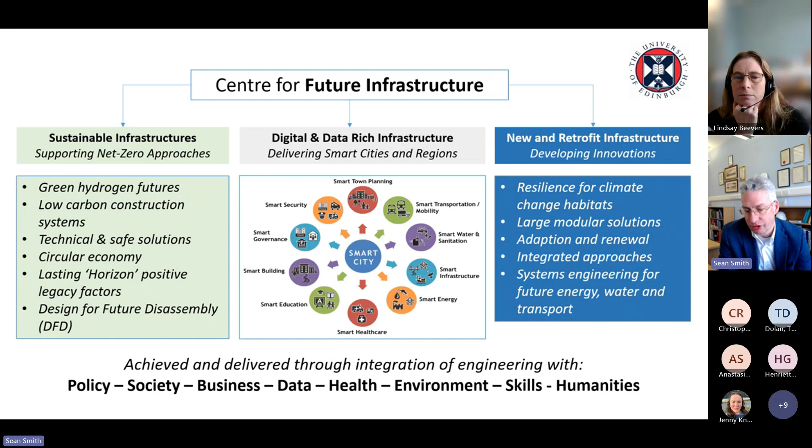Most importantly, our role is to link across many of the other schools - there are 22 schools across the University of Edinburgh - and already we've had projects linking geosciences, health, humanities, law, and various others.

So a bit about the future: we're going to spend a lot of money globally over the next 20 to 30 years, roughly about $100 trillion, on buildings, transport, and infrastructure - a huge and significant sum of money, very much needed when we look at resilience and infrastructure, both in the UK and overseas, but also when looking at societal growth.

This is one of the key features going forward as we approach the year 2100 and the population growth that's coming. One of the key things we'll have to deal with is how we're going to build 2 billion new homes in that 80-year time period - a huge increase in resources and all the related infrastructure that comes with it.

To give you an idea of what that means: taking the 29 countries on the left-hand side mapped across Europe, given that population, what we have to build in the next roughly 80 years is the equivalent of 6.25 Europes all over again globally - plus all the related infrastructure of hospitals, offices, industry, etc.

And therefore, of course, we have to be as sustainable as we can. Hence all the projects that CFI is involved with have a very strong environmental strand, as do many of the research colleagues both here and across UK universities.

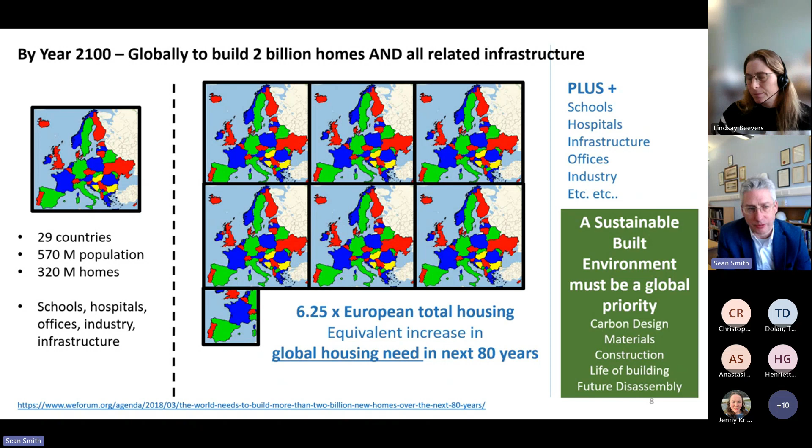I was giving a presentation back in November, talking about the timelines, whether it's Scotland, the UK, or Europe's net zero targets - 2045 and 2050 respectively.

Sitting down with civil servants, you tend to find we're talking about 22 years or 27 years away. But in fact, in Scotland we don't have that kind of time. We have 192,000 hours, but taking away weekends and half Fridays when construction doesn't work, we're down to 111,000 hours between November last year and November 2045. And we don't work 24 hours a day, so if we're really productive, working 8 hours in a 10-hour day with travel time, we're literally down to 36,900 hours.

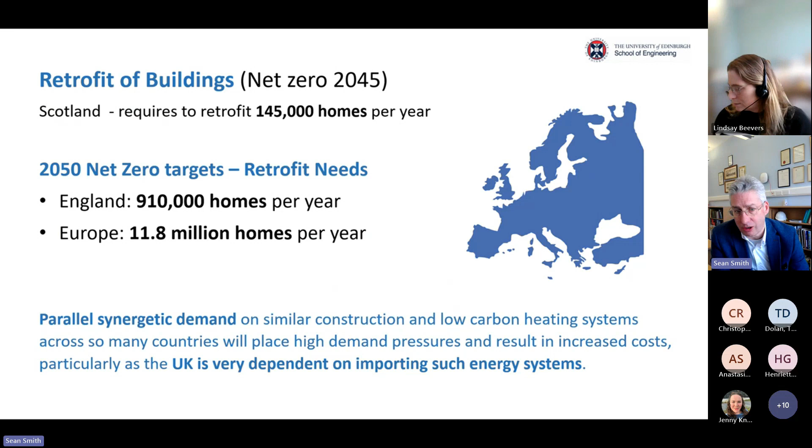On top of that comes all the work to come. In Scotland, we're going to have to retrofit 145,000 homes per year. England's about 910,000 homes per year, and Europe's just short of 12 million. What's incredibly important is that 85% of all countries around the world signed up to net zero after COP26 in Glasgow, so we have parallel, synergetic demand on very similar material resources, policies and ambitions.

So we can't carry on retrofitting house to house, starting all over again on each one. Could we look at an archetypes approach instead? This is one of the features we've pushed hard on, north of the border. We know this is also being looked at in England and Wales, and in countries like Germany and France. So when we do specific testing on archetypes to create solutions, there are specific tests we should all be doing, and we're collating a database and knowledge exchange point to accelerate this approach.

By archetypes, for example, in Scotland we have very old stone tenement buildings, roughly about 240,000 of those, all built pre-1919. They're hard to treat. We have 400,000 timber frame buildings in Scotland alone, something like 750,000 in England. That's a key archetype where, in terms of retrofit, we can approach it faster, better and more productively.

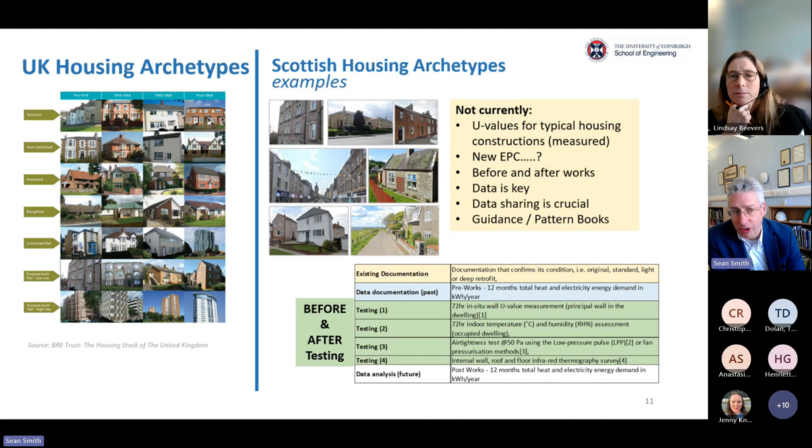We produced a report along with all the registered social landlords, housing associations and local authorities in Scotland, on achieving net zero in social housing a few years back. Within that we published a paper discussing the archetype approach for mass retrofit. That was then published by Scottish Government, and since then they've issued a tender on it. But in the meantime, everyone else has been cracking on individually, and we need to bring that archetype data together.

Scotland has a particular issue, just to explain. We have the highest proportion of flats in the UK, roughly about 38%, compared with England at about 21 to 22%, Wales at about 13%, and Northern Ireland at about 8-9%. So we have a pretty tough task ahead.

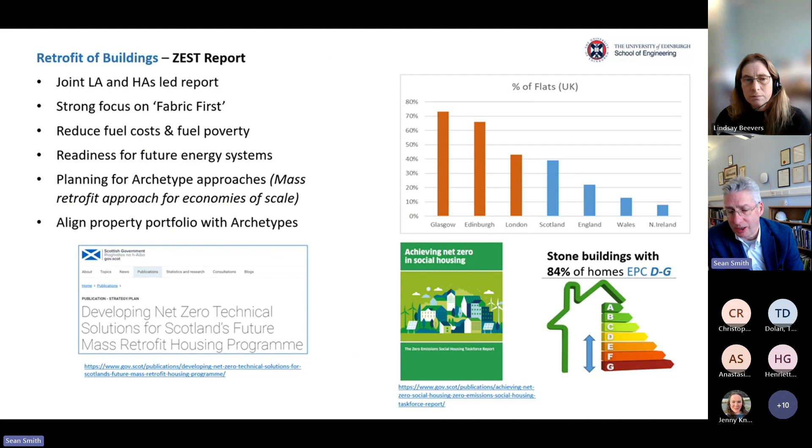In addition, the cities of Edinburgh and Glasgow have the highest density of flats of any city in the UK, at 68 and 73%. London's about 46%. So we've been running a series of workshops looking at archetypes.

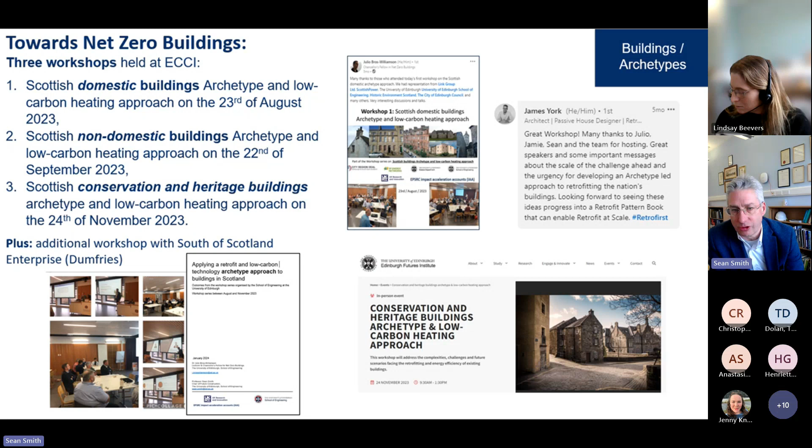It's been really tremendous, with lots of people attending. We looked at domestic buildings, non-domestic, and also conservation and heritage buildings. Beyond that, we've now drafted a report, which will go public very soon, on applying a retrofit low carbon technology archetype approach to buildings in Scotland. There are many learnings from that which could be taken into England, Wales and also Northern Ireland.

In addition, we advise and are brought in to engage in future procurement programmes with the public sector. In this case, Scotland Excel are managing the 800 million retrofit fund looking at energy efficiency in housing across local authorities. It's over 4 years, at 200 million per year, and they needed to design a contractor's framework approach to that procurement, making sure we embed all the key issues and factors within the programme. So we helped them set up a technical user intelligence group and a technical advisory board, and since launching just over a year and a half ago, it's been a multi-award winning project.

The diversity and range of what we do has to happen not just beyond our own cities and towns in Scotland, the UK and internationally, but also on our own doorstep.

So we had a new School of Engineering building that was designed back in 2017, 2018. COVID hit, it got delayed. So as a result, under the sort of design-in-for-change approach, we were asked to review that in 2021 and 2022 to look at, can we actually enhance or improve its approach towards net zero?

We've redesigned a lot of components in it, reduced the fabric embodied carbon by about 65%. And in addition to that, we've decided that because there's still some unknowns as to some of the future technologies, what we've done is we've designed in a net zero laboratory.

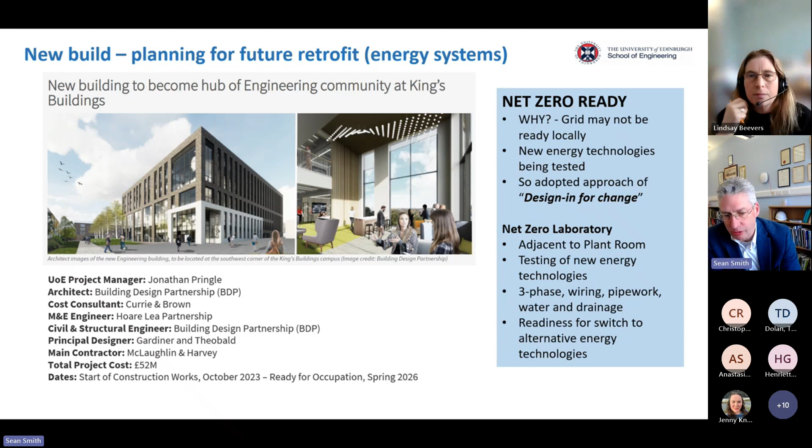This is on the ground floor adjacent to the plant room. Everything will be wired in, plugged in, water, etc., everything that we would need. We can test some new technologies there, but when the timing is right and the technology is right, we will then make that effectively the engine of the building, and it will power the building. So we're all ready to wire that up in the future as and when we're ready. In other words, we're making the building net zero ready. It's not net zero from the outset, but we're making it net zero ready for that transition.

We were delighted to see that the Department of Energy Security and Net Zero then launched a call, a tender for that, which I believe UCL is undertaking. But we were actually working almost in parallel with the thinking that was going on at UK government. We hadn't actually spoken to them, but we're delighted to see this.

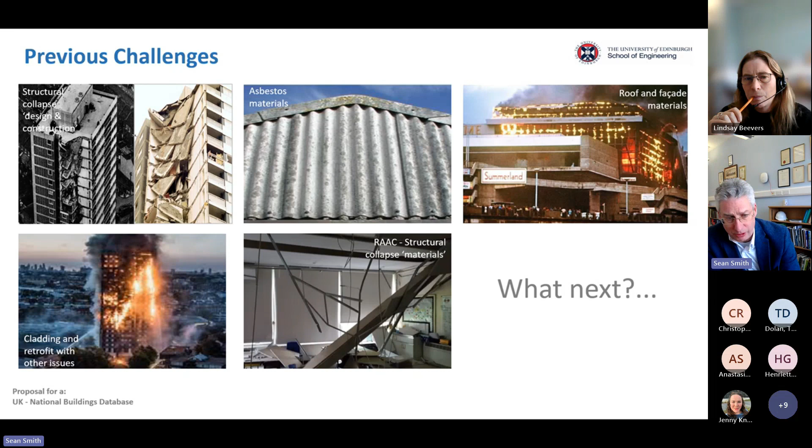We've had a number of meetings and events that we've discussed with people and multi-stakeholders, including the Health and Safety Executive. And the primary users of this are many and diverse in who and what could use a national buildings database. It seems strange in this day and age that we don't have that database ready to hand, or that data available across existing databases.

But if we could have this, then we could really make a huge step change in how we approach not only retrofit, but also how we approach circular economy for future buildings when they come to end of life, if they're not going to be reused. Also how we can look at safety and other features and avoid hunting for different building issues as they arise, because we'd have a database that would have a lot of the information across the UK.

In terms of net zero, our colleague Julio Bros Williamson, who's our Chancellor's Fellow in Net Zero Buildings, is leading one of the largest net zero developments in the UK. This is based in Edinburgh, down at the Granton waterfront, and it's a fantastic project looking at a whole stream of different activities—not just net zero and energy performance, but off-site construction, digital approaches, future monitoring, etc.

This first test site will be one of then a phase of 1,000 net zero homes, and there are further phases to come—another 10,000 homes are planned along the waterfront there. So a great opportunity to create impact and drive the whole net zero agenda.

When we look at infrastructure, we're quite lucky—we've got lots of petrol stations for travel and everything else, but of course we're going to get rid of petrol and diesel. Currently, when you look at the distance routes across Scotland, Scotland has 38% of the UK landmass, but only 8.5% of the population, so we're quite spread out. In addition, we've got long distance journeys for everything from the whiskey that's transported to the fish and salmon in the northwest, to the tourism which goes on right across the Highlands and Islands.

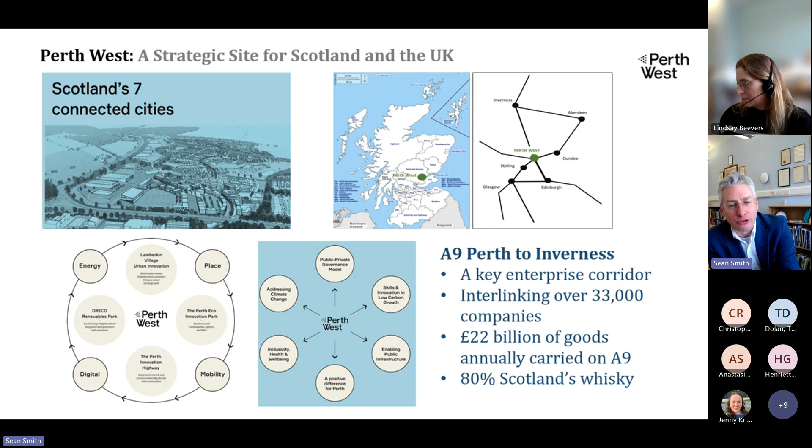Most importantly, that one road between Perth West and Inverness in the top right carries 80% of Scotland's whiskey, and that gives the UK Treasury roughly about £6 billion a year in excise duty. So it's quite an important transport corridor.

We've also been involved with a number of reports, including a circularity gap report. You may have seen these before. A number of countries and also cities have undertaken this approach using a common methodology, and we were on the advisory group looking at this.

Globally, circularity is roughly 8 or 9% - we're reusing about 8 or 9% of things we consume. Norway's circularity is 4%, and in Scotland it was even worse, only 2%. This is because we're so heavily reliant on imports when you consider materials for clothing or areas such as plasterboard - we import that predominantly from over the border in England or from Europe because we don't have our own plasterboard plants. So effectively we're consuming a huge amount of resources we need to bring into the country, creating this gap and very low circularity.

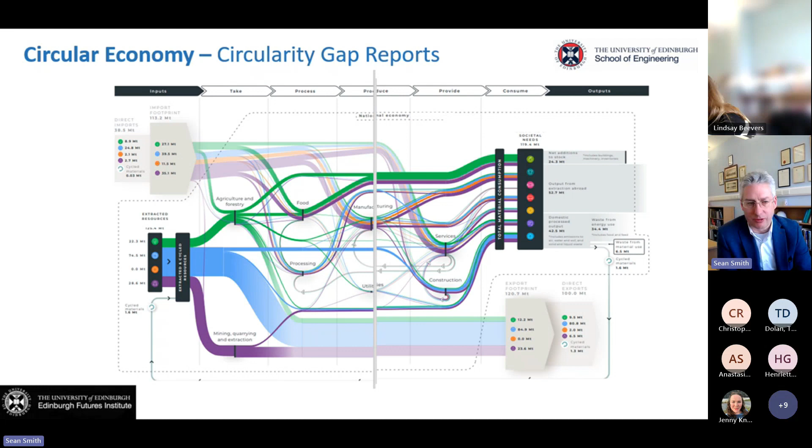The world's first trials will commence this year. We're very excited about that and the great opportunity to explore its operation, particularly for flats where there are many limitations on the use of heat pumps and other issues, or there's not space for water tanks.

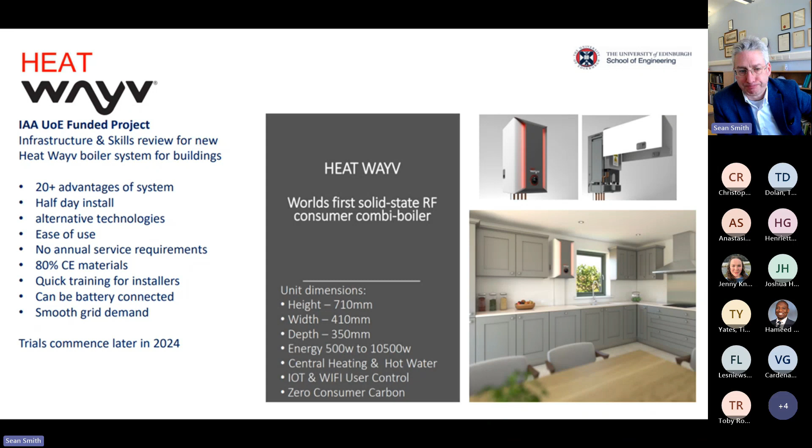Looking ahead, we also have to consider the workforce. Some years ago, I was involved with the Edinburgh South East Scotland City Region deal, and we were looking at what's to come. Edinburgh, in the southeast of Scotland, is the fastest growing region in Scotland - the 5th fastest growing region in the UK. Considering the amount of housing and infrastructure that needs to come, we really needed to scale up what we were going to have to do to deliver at that scale, not only for retrofit but also for new build.

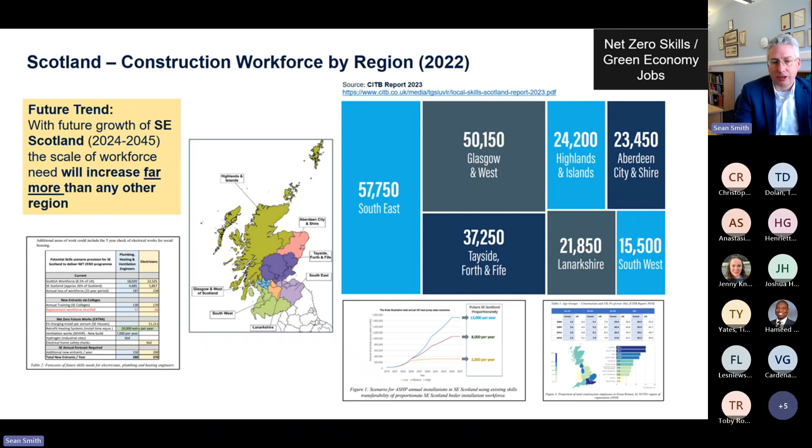So we're working with the local colleges and other universities, such as Heriot-Watt and Napier University, who are involved in infrastructure and built environment, to try and get that accelerated workforce as quickly as possible - and that's going to be a tough task. We've also assessed the gap analysis required and the lack of take-up that's going to happen in adoption of some low-carbon heating systems without this increased workforce.

Internationally, just some examples here of some of the projects we're doing. We've been working with Cornell recently under a joint knowledge exchange fund with the infrastructure policy unit there, which has been very exciting, and we'll do some cooperative work over the coming year.

We worked with the Italian government over 2 years in Milan, looking at the ITC, the Institute for Technology and Construction of the Italian government, on net zero transition and technical compatibility factors for infrastructure. We currently have a project with Dubai, looking at sustainable regeneration of part of Dubai.

And the Galapagos Islands work is multi and interdisciplinary, with colleagues across the university from architecture, planning, law, health, biological sciences, geosciences, and engineering, supporting the Galapagos Islands in this transition of where they need to go with net zero.

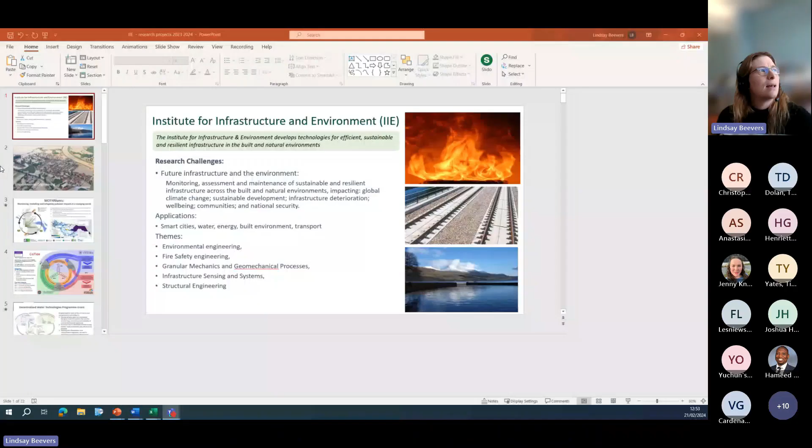So I'll just share my screen and then go into presenter. Now, can everybody see that? I'm hoping that that's a yes. Yeah, we can see it. Thanks, Lindsay. Brilliant. Thanks, Sean.

Okay, so I'm going to take you through a little bit of what we do within the Infrastructure and Environment Institute. What Sean's given you a flavour for is some of the future infrastructure work that goes on, and that fits within a theme within our institute. So this institute is one of 7 across the School of Engineering, and within that we are predominantly focused on looking at different technologies for efficient, sustainable and resilient infrastructure in both the built and the natural environments.

I like to include the natural environment because that's very much where I sit. And it builds on that future challenge that Sean was talking about earlier, future infrastructure and what we're going to need in order to deal with the climate emergency and adapt and mitigate the coming climate emergency. So we have a number of themes where our applications go across from smart cities right through to the built environment, transport, and energy and water.

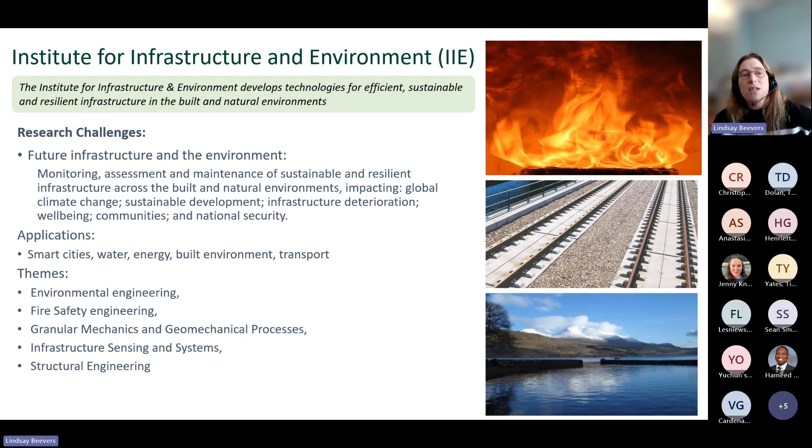So we have 5 themes within our institute with the 35 academics: environmental engineering, fire safety engineering, granular mechanics and geomechanical processes, infrastructure sensing and systems, as well as structural engineering. So you can see it's a broad gamut across the whole of the civil engineering spectrum. So I'm going to pick on a few particular projects from each of these 5 themes and talk you through them a little bit. So the one that's closest to my heart is obviously environmental engineering, and I'll take you through that theme first. We have a number of different funders going from NERC through to EPSRC.

The first project that I wanted to highlight here is some work that we're doing with the University of Stirling, building on the River Forth Environmental Resilience Array, which is a highly instrumented catchment within the Forth estuary, looking at both water quality and water quantity. And this project, which is MOT for rivers, monitoring, modelling and mitigating pollution impacts in a changing world, is part of the NERC Freshwater Quality Programme, where we're looking at how emerging chemicals and pollutants are moving through our system and how climate change may be influencing that, in order that we can understand this better and then think about how we might adapt and mitigate this in the future.

So it's bringing together state-of-the-art science. This is coming predominantly from the Stirling Group, where they have cutting-edge sensing equipment, as well as the next generation satellite assessments, along with the University of Glasgow bringing machine learning and advanced statistical assessment to the problem. At the University of Edinburgh, we're responsible for the hydrological modelling and understanding the movement of the pollutant chemicals through the catchment. So it's really interesting.

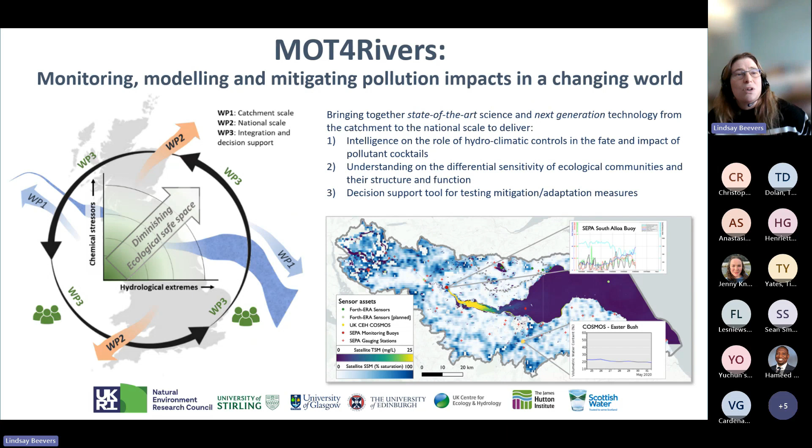It's only in its first year, so we've got a long way to go, and it's a very interesting project, bringing together a number of different actors. In fact, just along the corridor is the first meeting of this programme grant. This one, CoTide, is also a very interesting project. It's funded by EPSRC.

It is a programme grant led by the University of Oxford, looking at tidal stream energy and how we can maximise and scale up the opportunity of tidal stream energy. Here in the University of Edinburgh, we're responsible for a number of things. What I'm focusing on here is the hydrodynamic modelling and the coastal modelling that the University of Edinburgh within the environmental engineering theme brings. On one of our other sites out at FastBlade, we are looking at the composites and how different composites can be used within the turbine construction. That all comes together with the university that's being led by the University of Oxford, and it also includes the University of Strathclyde.

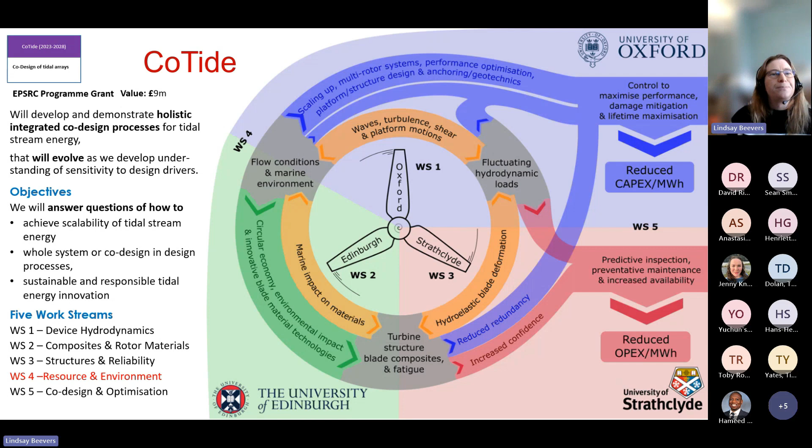Another programme grant, this time led by the University of Glasgow, is looking at bringing together off-grid water and wastewater biological treatment systems to understand a better way to deliver water to households. So it's led by the University of Glasgow, but it involves the University of Edinburgh looking at different membrane technology that are both affordable and low energy, so that we can provide off-grid solutions to particular householders.

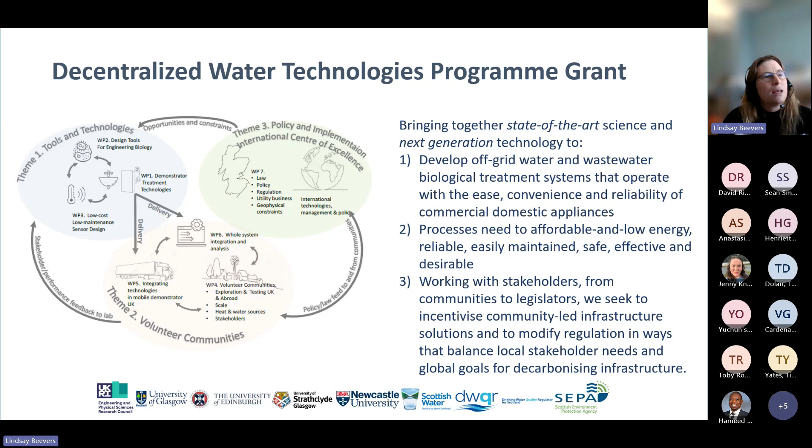If we then move on, I won't leave this video running for too long because it's quite mesmerizing, I find, but one of the real things that the University of Edinburgh is known for is also fire safety engineering, and we have a very strong fire safety engineering group. They're heavily involved in looking at the Grenfell Tower inquiry, as well as a number of recent projects looking at fire spread in timber ceilings.

Now, I think this is worth highlighting because some of the things that Sean was talking about, retrofit and looking at timber frame buildings, we also have these associated issues where we've got to start looking at what is the implication then if we start using more timber in terms of fire hazards. So there's a number of projects EPSRC funded, but as well as HSE funded on the hazard posed in tunnels, for example, by the increased use of hydrogen. So what are the knock-on implications of the adaptation that we're doing as a result of moving towards net zero?

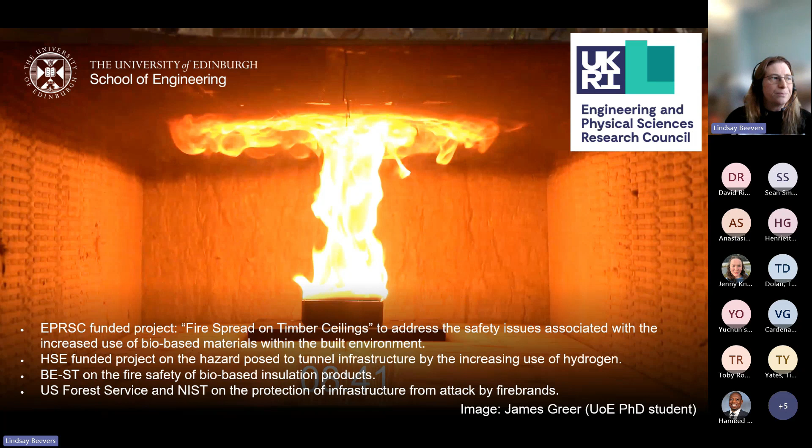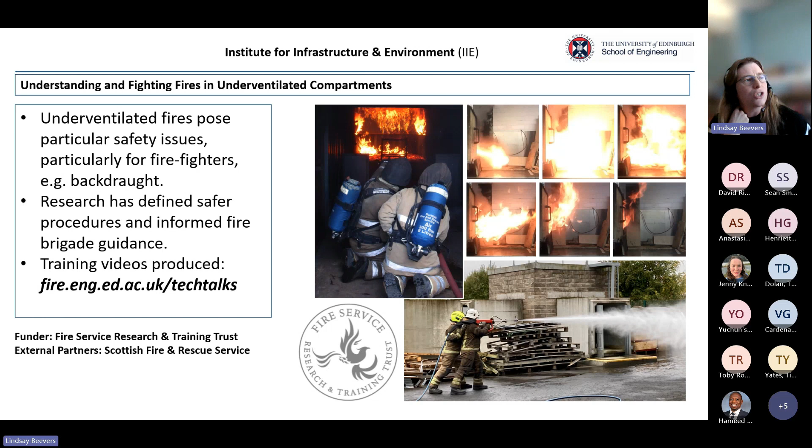Within the fire safety engineering component, there's also considerations on safety. So we need to think about safety for firefighters, and the research that goes on here has helped to define safer procedures to inform the fire brigade guidance and how people work in confined spaces or within emergency situations. So that's working very strongly with stakeholders such as the Fire Service Research, as well as Scottish Fire and Rescue Service.

Another of our 5 themes is infrastructure, sensing and systems. And there's a lot of interesting work going on here, looking at how we can actually assess for damage within infrastructure without actually breaking it or getting inside. So this is using 3D acoustic wave sensing, whereby they've looked at assessing this structure here, and then using the sensing to check after the improvements have been made to see that this has indeed done what it was hoped, what the purpose of it was. So can we use this to check what's going on inside?

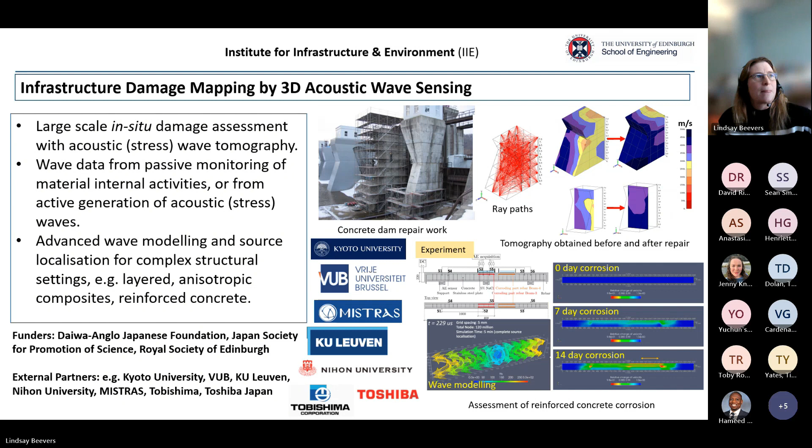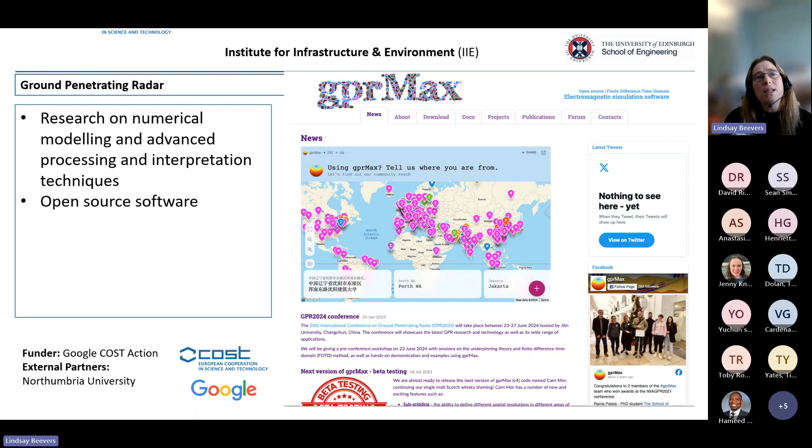As well as acoustic monitoring, we also use ground penetrating radar. And this is some work that's undertaken by one of my colleagues, Antonis, who is developing open source software, in collaboration with Google and the EU COST Action, in order to make this software available so that other people can use this wherever they're working in the world. And here you can see their webpage if you're interested. They've just got some more funding from Google in order to do some more work advancing this software.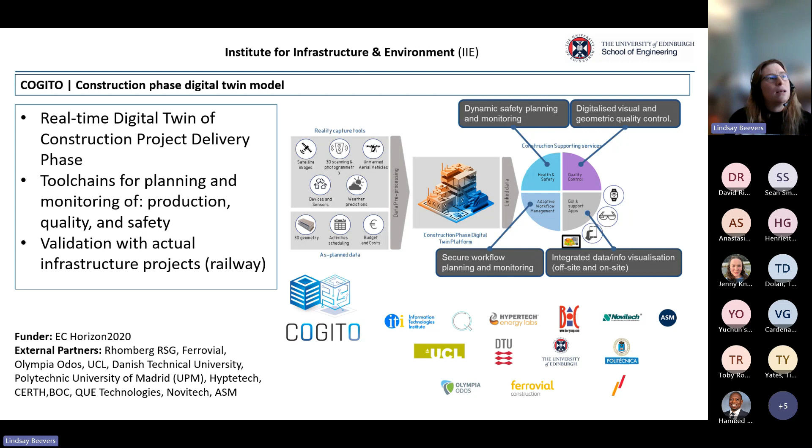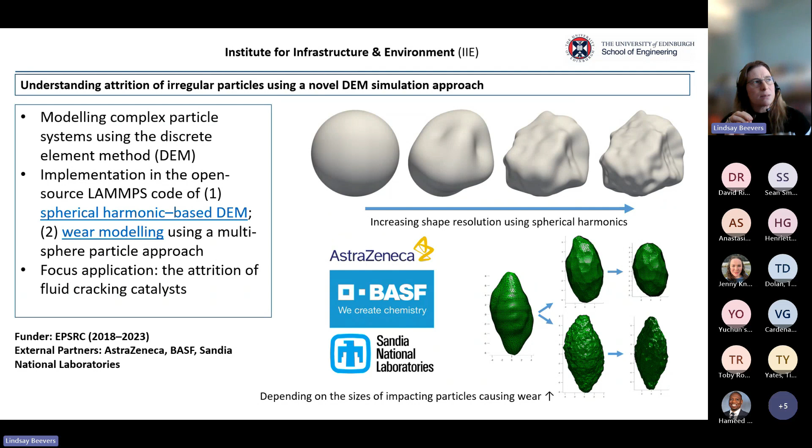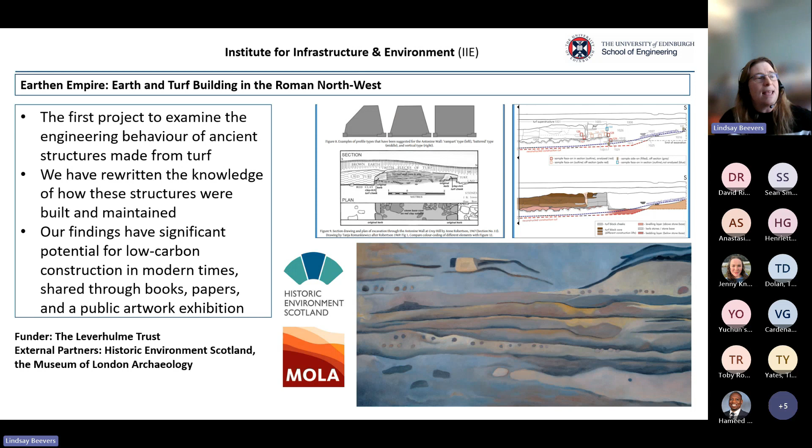Moving on to the granular mechanics and geomechanical processes group, we have quite a range within this group, going from very fine particle DEM simulation modelling approaches, looking at how we can model complex particle systems using DEM, through to research that aligns more with our infrastructure colleagues, looking at earth and turf buildings and the historical aspects of that. So can we use vernacular materials in order to deliver low carbon, low impact construction? And can we bring that from the past to the future? And that's funded by funders such as the Leverhulme Trust, and again in partnership with Historic Environment Scotland.

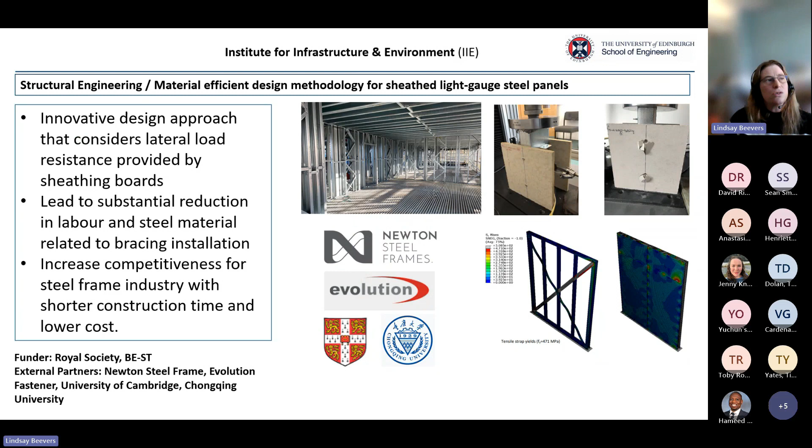And then we have a large group working in structural engineering, which work very closely with Sean and the group that he's working in, where we look at innovative materials and innovative design approaches that allow less labour and less steel material to be used when we're installing particular structures, and that can reduce construction time and reduce costs.

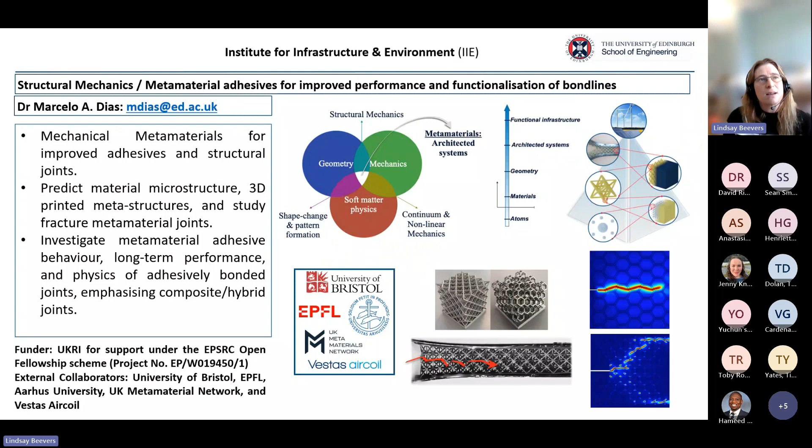We also have a colleague, Dr. Marcelo Dias, who's looking at metamaterials, and that's where we're starting to bring in both the mechanics but also the geometry of materials in order to understand the equilibrium states within materials, and whether we can use that understanding in order to better understand how things collapse or how they reorganize when they do collapse within matrices. And that's an ongoing project, an EPSRC Open Fellowship.

And then finally, I think it's a really interesting project that has just finished, and the team have just submitted for another grant, which is an interdisciplinary grant to UKRI. This builds on work that they've been doing in Madagascar, working with the International Red Cross. It's an interdisciplinary team of engineers with climatologists and social sciences, predominantly in Madagascar. They have also done some work in Kenya.

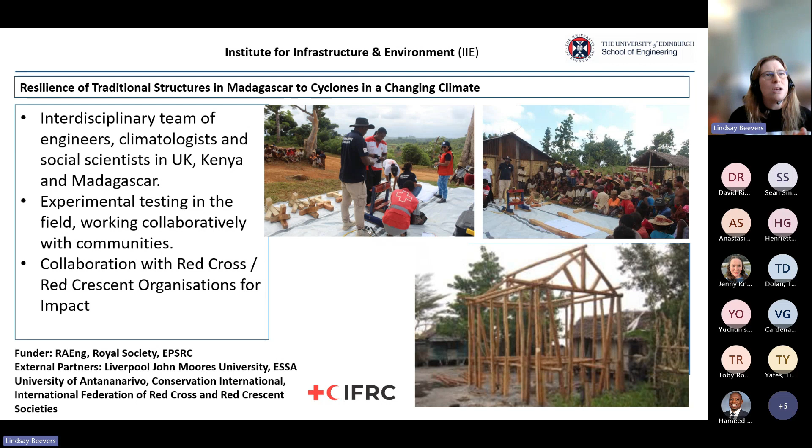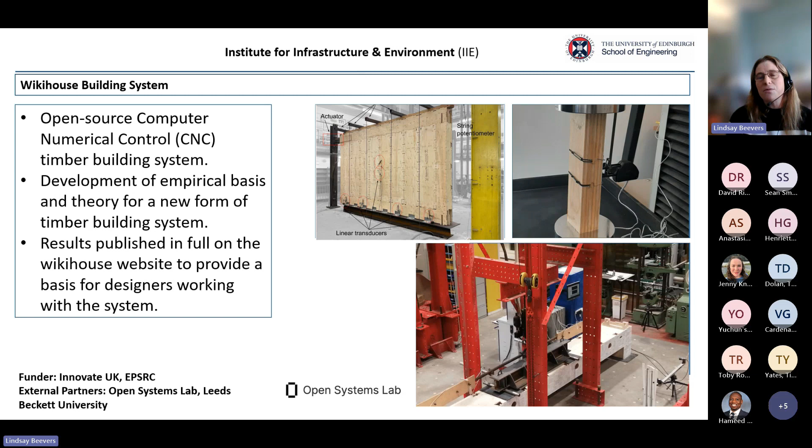And so can we test these structures? Can we test the connections within these structures in these cyclone-prone areas in order to ensure their resilience moving forward? So I think what you can see from these slides is this consistent thread that works all the way through from environmental engineering to our structural engineering, of bringing together research under the theme of responding to the climate emergency.

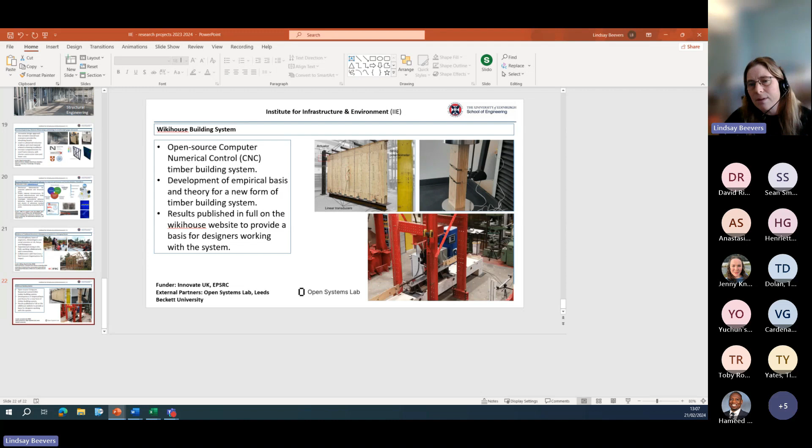I'm going to end the show there, and I will stop sharing. And I hope that you can see from that a bit of a flavour of the work that we're doing in Edinburgh and how that links quite closely to what's going on in the Centre for Future Infrastructure with Sean.